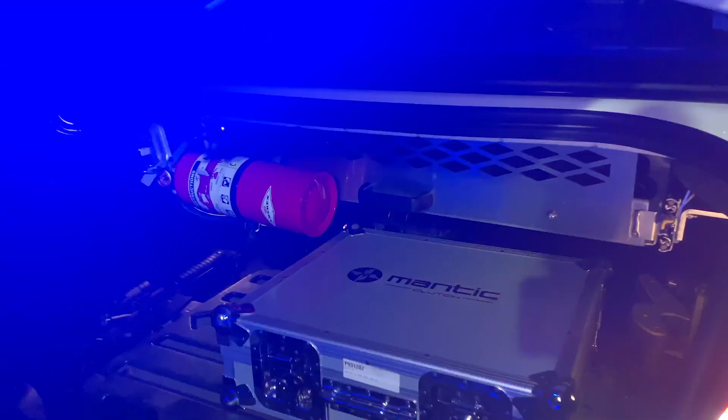Oh sweet, it's my Mantic clutch. Is it heavy? Yeah, it's pretty heavy. I need two hands.

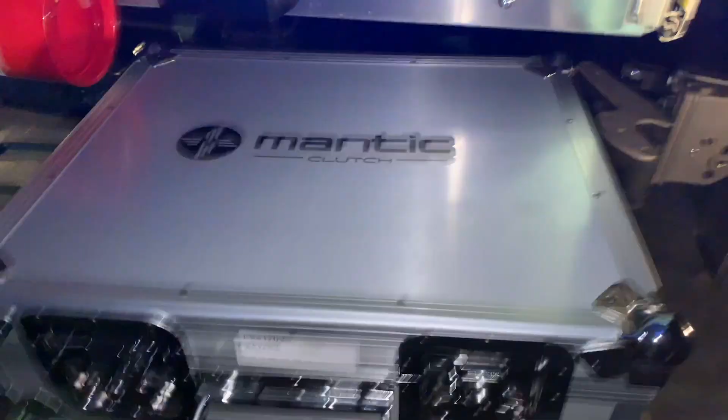Let the attack begin.

This video is about the clutch install of the Mantic USA triple disc clutch that I put in. The footage you see is all that I got because I was more focused on getting it installed correctly. I'm working by myself, trying to get the camera angles, and it would have been quite hard, so I just got limited footage.

It's been in for a week now. I have about 200 miles on it, and I need to break it in for 500 miles. I absolutely love this clutch. It's not as stiff as my factory clutch because they did some work on it, plus the hydraulic release bearing and everything. Once I break it in, I'll give you another video really getting into the clutch install with this one. I really like it, as I said.

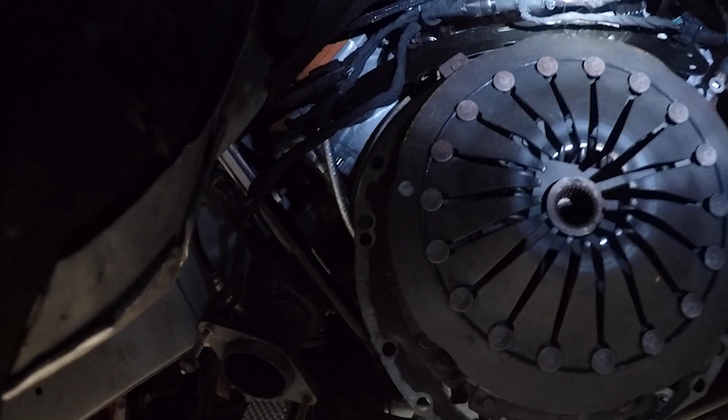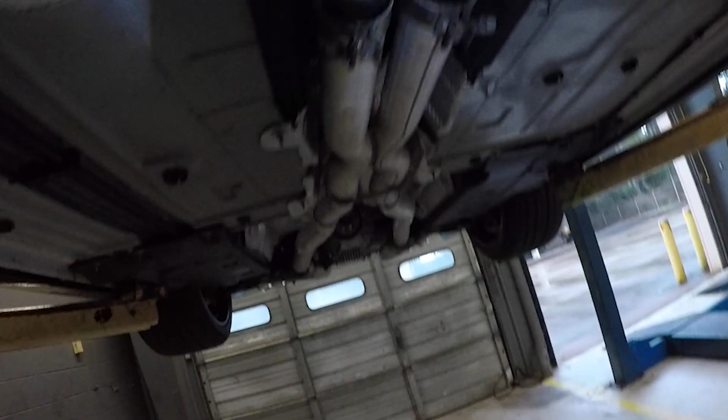Doing everything. There's the factory clutch. And I'll show you the transmission. There's that bearing I've got to change out, the hydraulic release bearing. There's the back part. As I said, I've been doing this by myself for like 3-4 hours now.

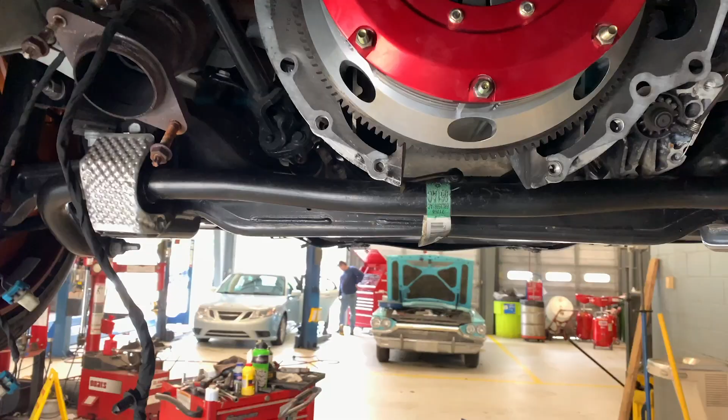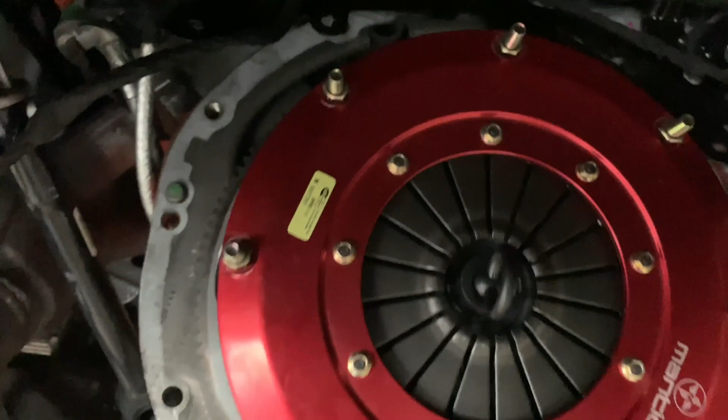Tool in there. So now what I'm going to do is put on the release bearing and remount the transmission. So here's the hydraulic release bearing. I have some Mopar fluid, that's what we call for our clutch. There's the new hydraulic release bearing in there. Good to go.

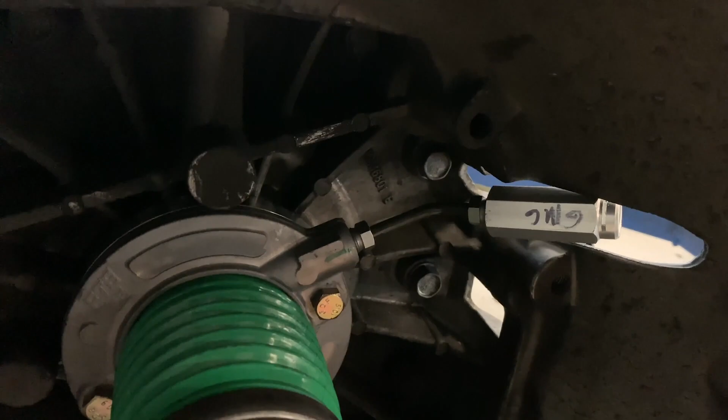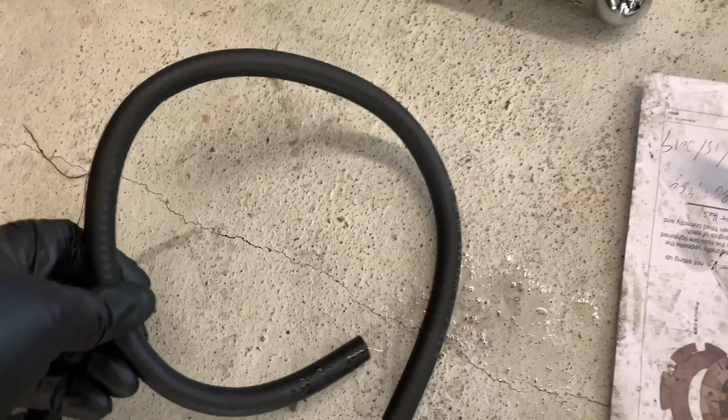Signed by Mantic clutches. There it is, the shaft. I use this hose, I'm by myself so it's kind of hard to do, and I connected it to that. What I did was try the hydraulic release bearing with a bleeder so I don't have to do it manually. The manual says like 200 pumps, so I'm not going to have to do 200 pumps with this hose, it'll cut the air out. If anything, there's just a little bit of air bubble right there, but that'll be fine.

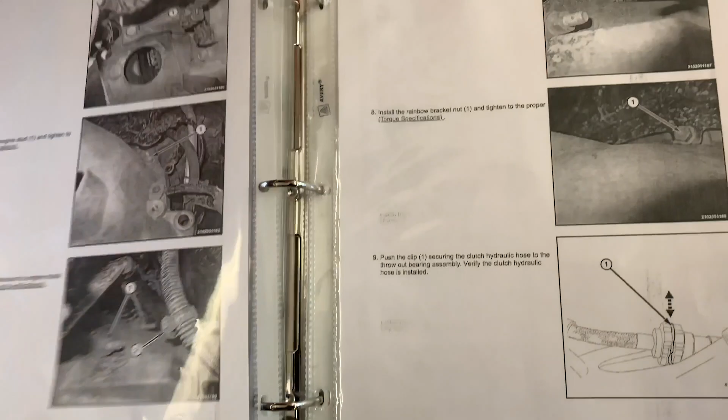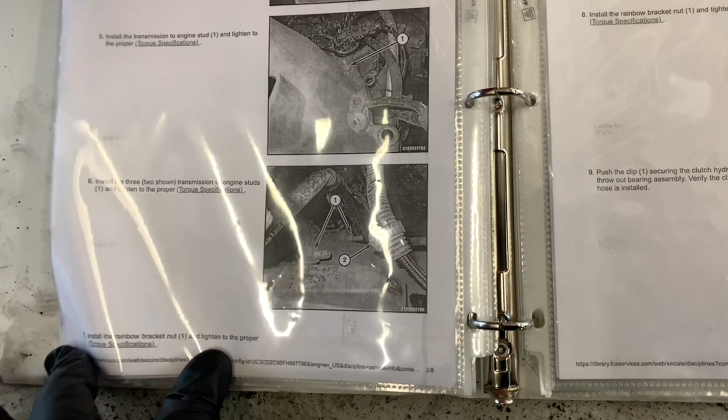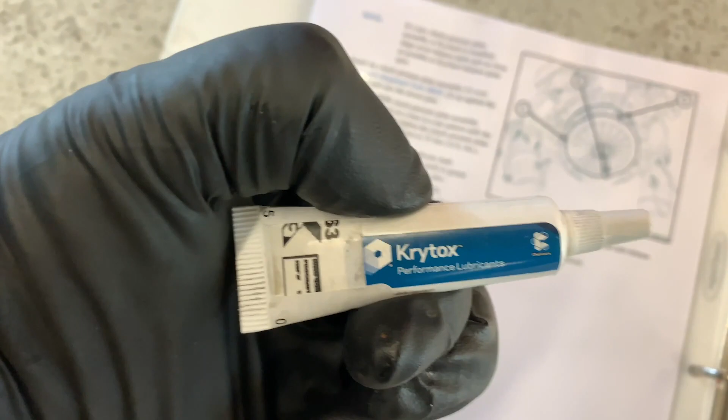So here's my book. I put my clips in here so I won't lose them, where I got them out from. I greased the splines a little bit to help get it in there. This is it right here. Like I said, this little tube was $20.

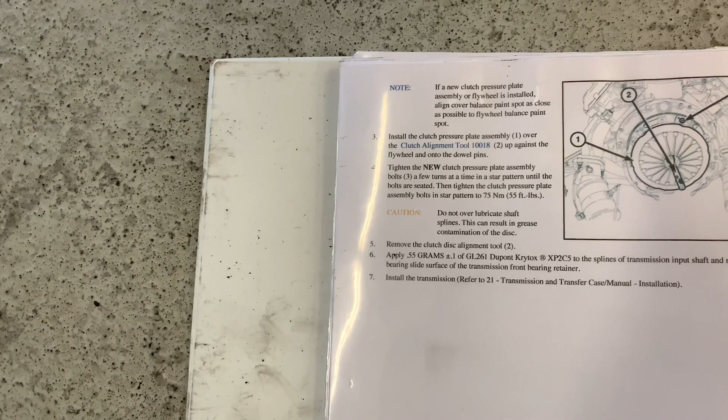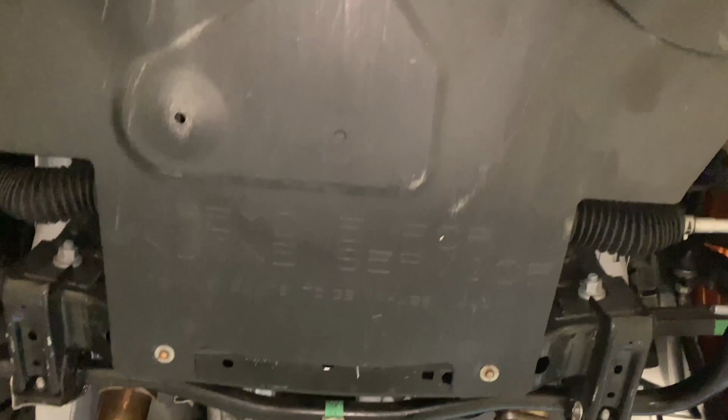Yeah, so I'm about to put it in. Let's see. Console and stuff back in from the shifter, and give it a start, see where it goes.